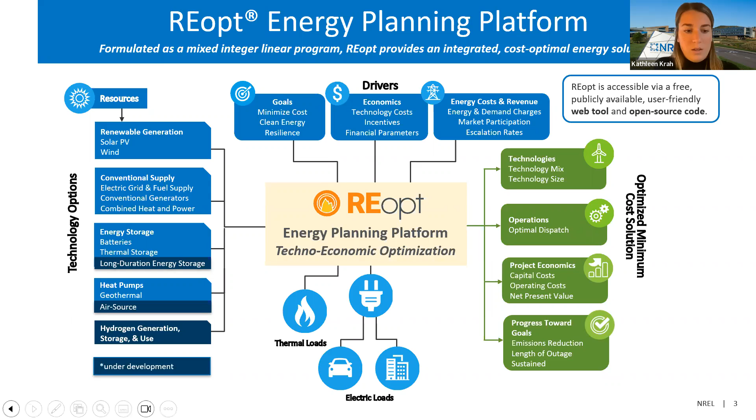I'll probably mention life cycle cost of energy throughout the presentation. So just wanted to share some definitions. So REopt is, as I mentioned, a life cycle cost optimization tool. So we're looking at the present value of all costs of energy at the site throughout an analysis period, typically 25 or so years, depending on what technologies you're focusing on.

So when I mention life cycle cost, I'm referring to capital costs of any technologies that the site has deployed on site, any incentives that might have been available to help mitigate those costs, O&M costs throughout the operating period. So that's typically applied annually, any electric grid purchases, and any fuel purchases.

And then the net present value of the DER system is the life cycle cost savings, or if it's a negative NPV, then the increase in life cycle energy costs with the DER system relative to the business as usual case. So if the DER system can provide cost savings, it will have a positive net present value. And that's the difference in life cycle costs between the business as usual and optimized scenario. So the higher the NPV, the more net value that the asset is providing.

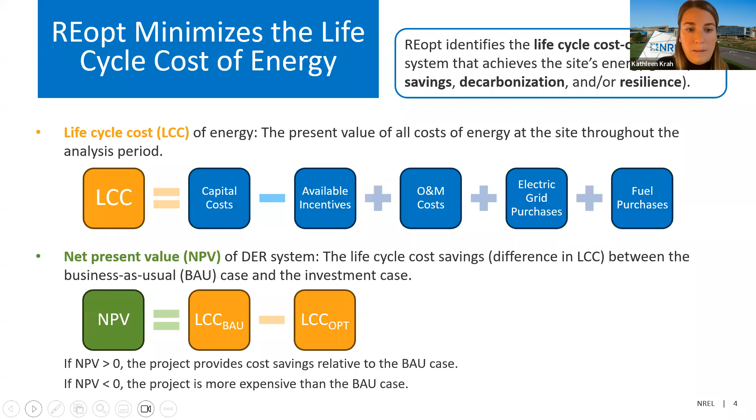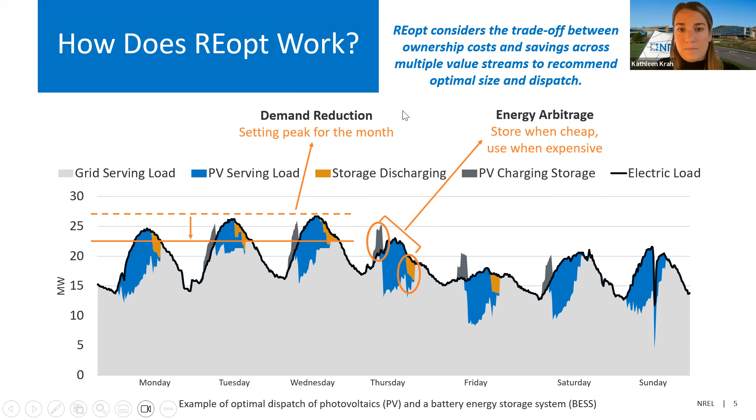Today we're going to focus on PV and battery as two of the more common DER technologies to be deployed commercially. But I did just want to highlight the thermal technology modeling that we also offer in REopt. I mentioned we model combined heat and power, geothermal heat pumps. There's also absorption chillers and hot water and chilled water thermal energy storage.

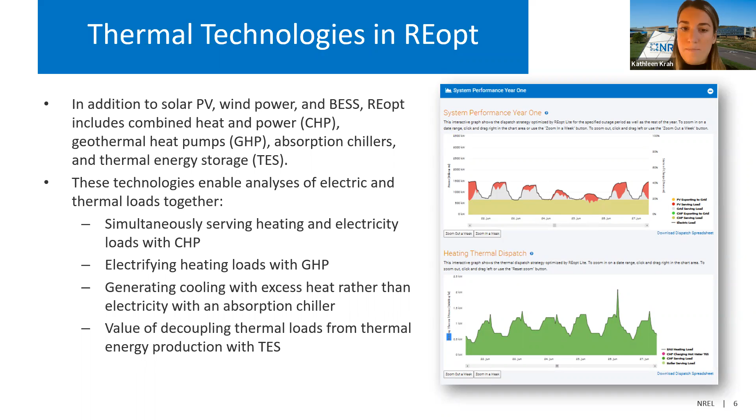And so REopt can help co-optimize between heating and cooling requirements with electricity demand and how these different technologies can help reduce overall costs and overall emissions and support resilience, both thermally and electrically.

I also mentioned the consideration of resilience in DER value. So we focus on resilience value of DERs in relation to how on-site technologies can help extend outage survivability of either critical loads or continuity of operations, or if there's a site that serves as a community resilience hub, there might even be an increase in load relative to baseline operations.

This site had a strong value of resilience. So you have to think about the costs of resilience versus the values of resilience. They wanted to increase the duration of survivability. They needed to keep the overall costs the same or lower. And so we used REopt and evaluated solar and storage to support cost savings and resilience.

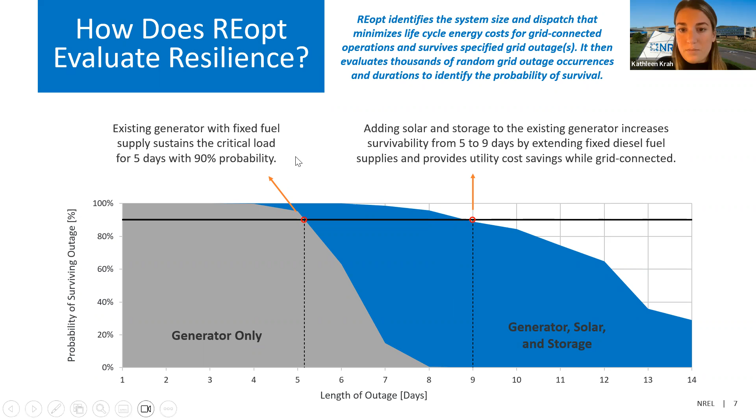REopt also does detailed renewable energy and emissions accounting. So we have hourly grid emission rate data modeled in REopt. We also use projections as assumptions about how grid emission rates may change in the future as the grid continues to become greener. And then also model fuel emissions for on-site fuel consumption, as well as renewable energy contributions. And so we're doing some renewable energy and emissions accounting in all of our REopt analyses.

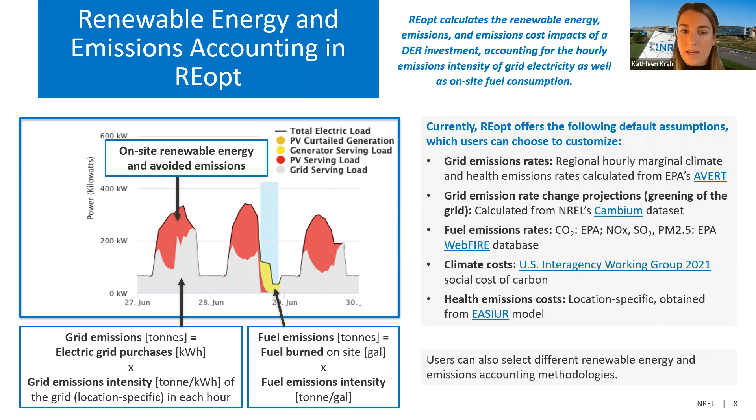So as I mentioned, renewable energy and emissions accounting is happening in every REopt analysis, but the user can use REopt to identify how to achieve, for example, 50% on-site renewable electricity annually at the site at least cost, or how to reduce the site CO2 emissions by some percentage relative to the business as usual scenario.

In that case, they can compare if there's an increase in life cycle cost of electricity in that reduced CO2 emissions scenario, and quantify the break-even dollar per ton CO2 cost of carbon dioxide emission reductions. And then we can also include climate and/or health emissions costs in the optimization, rather than just calculating the impacts after the optimization if desired.

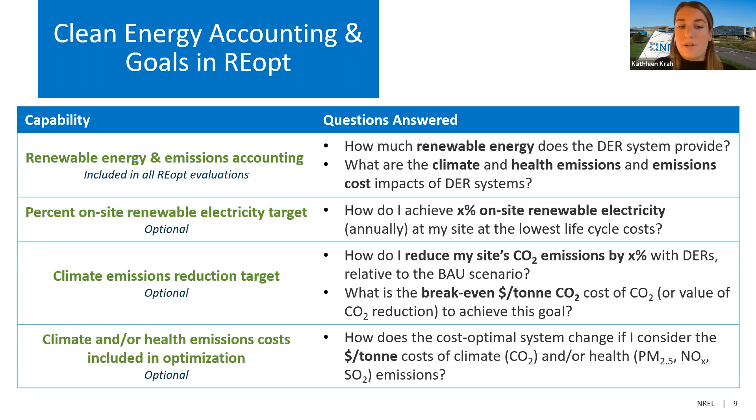I mentioned REopt is accessible as a publicly available free web tool, and then also the underlying open source code. I will be demoing the web tool and inviting participants to follow along on your own web browser to run a few REopt analyses today. But we try to make this user-friendly. The web tool offers a bunch of customizability.

I think there's over 100 different inputs that can be customized, but we only require 3 or 4 inputs. So it can be simple and easy and user-friendly, or more advanced depending on how much data you have, the user's level of expertise, and what phase of analysis, whether it's a high-level feasibility study or moving closer to the design phase.

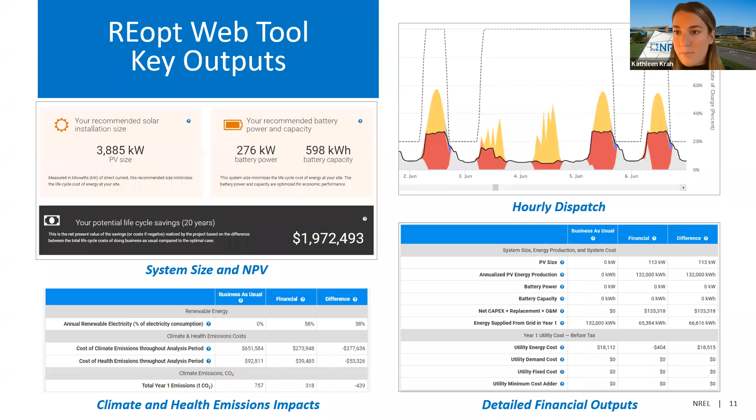And then we also show detailed financial outputs, comparing the business as usual case to the optimized scenario, showing the savings or increases in different aspects of energy costs and savings. And then there's also a pro forma that shows these economics year over year. That's actually currently being updated, so that's temporarily unavailable and not shown here, but I think is really useful for translating REopt outputs into RFPs and planning. And we hope to get that back up in the next few weeks or months.

So here are some links for accessing REopt. The REopt web tool, again, the focus of the training today, is available via web link. I also included the links for the various GitHub pages for the API, the Julia package, which is nested within the API, and then analysis scripts that allow users to use rather than just develop the API and Julia package. We also offer some web tool user guides on the REopt webpage where the tool is located. I'll point those out today during the demo.

And then we also have a user forum. I think most people who use this tend to be towards the development side, but we're hoping that more web tool users also use it. So we post any questions that we receive directly to make those answers more broadly available. And we're also trying to build some community around the user base. So definitely invite you to share any questions that you might have, and our team is pretty responsive in answering those.

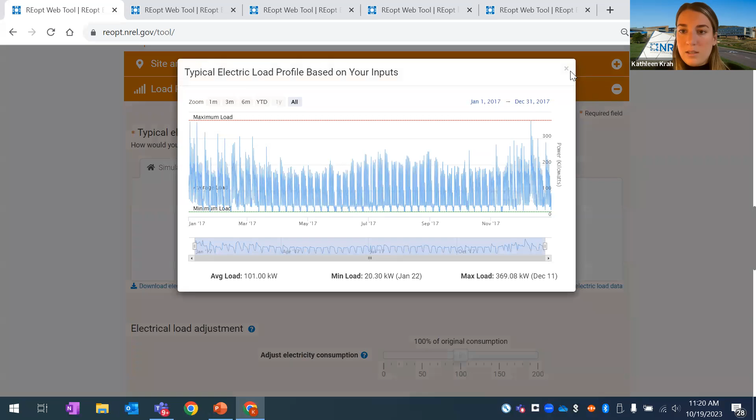I'll also mention if you want to chart your load profile, I should have mentioned this here, you can see what the simulated load profile looks like and see the patterns each week. You can see the days increasing and then also seasonal patterns. And you can also download this information if that's helpful for you.

And similarly, we can look at emissions factors. So by default, looking at the Rocky Mountain region, we can see how the simulated grid emissions vary throughout the year and throughout the day in this region.

I mentioned before, climate and health emissions costs could be included in the objective function or in the optimization if desired. We're not going to do that because those are less typically real costs actualized by the site. Those are more like societal costs. But you could consider those if desired.

And then there's some options to fine tune different accounting methodologies about how exported clean energy that's generated on site is treated. Are they allowed to count towards your renewable energy goals or carbon offsets? And then also we have the default climate emission and health emission cost rates down here. So this section, I typically leave all the defaults, but wanted to explain those different inputs.

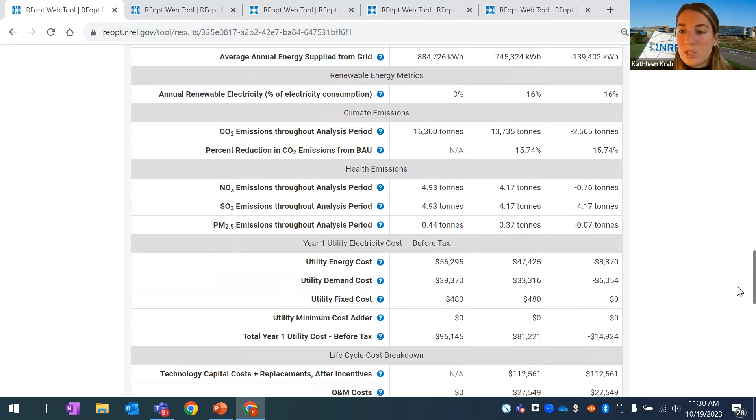emissions impacts, how much it's reducing emissions relative to the business as usual case, health emissions impacts, so NOx, SO2, and PM2.5 emissions impacts. Here we have a breakdown of energy and demand charge savings. So here we have the year 1 costs in the business as usual case, here the year 1 costs in the optimized scenario, and then here we show the savings, so negative value being savings.

And similarly, the life cycle cost breakdown, so capital costs after incentives, O&M costs, total utility costs, and some summary financial metrics, including capital costs before incentives, year 1 O&M costs, total life cycle costs, net present value, simple payback period, internal rate of return, and the LCOE of PV, levelized cost of energy.

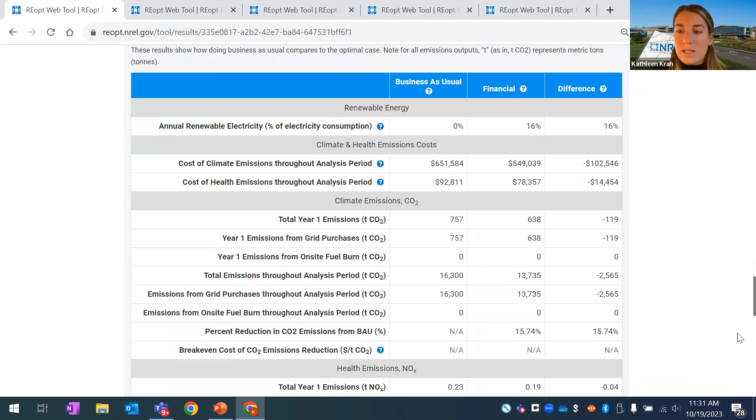You can also access your inputs here, renewable energy and emissions metrics in a little more detail than in the summary table. You can show the default values that were used, and some caveats and words of caution and next steps of how REopt results can be used to inform projects.

I think, let's see, I might pause here for questions, and then I can go back and show the resilience and clean energy and portfolio analysis capabilities if and as time allows. Yeah, so we've got a couple questions in the Q&A.

Awesome. First one is, when you input a site address, does the platform have the ability to account for the orientation when roof space is selected? Great question. We do not have geospatial data on roof angles, so that would be something that you would need to enter down below in the PV model.

So this array azimuth input, 180 means it's south facing, 0 would be north facing, so if you're in the southern hemisphere. But if it was offset from 180, either a little bit east or a little bit west, you could enter that information. I think Google Earth and Google Maps can be helpful for that estimation.

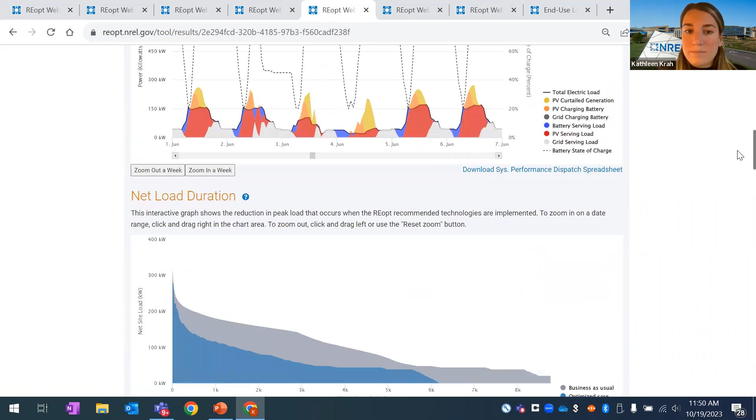A useful metric, I think, is to compare this net present value to the business as usual life cycle costs, because if your site has like $1 million of electricity costs, like some of the bigger campuses, throughout a 25-year period, an increase of $70,000 is not significant. If your site is only paying $10,000 a year in electricity costs, a $70,000 increase is very significant. So that's a helpful comparison point. But all the other outputs are the same types of outputs, just different numbers now with a larger system.

And then finally, I will demo the resilience capabilities. So I just copied that analysis. I'm actually going to deselect the clean energy goals and instead include resilience. And so that added this resilience accordion. So there are a few inputs now that get added for evaluating resilience.

So what REopt is doing for resilience is we simulate an outage or outages throughout the year. We simulate a critical load, so what portion of the typical load you want the on-site system to be able to support, and how long the outage would be. And REopt will identify a system that during normal grid connected operations is operating to maximize the value of bill savings and is able to sustain that specific outage.

Once that system size has been identified, REopt will also calculate the probability of surviving any range of outages, since these are specific simulated outages. So we'll just walk through an example of that. The critical load factor is the percentage of the typical load that would be desired to be served during the outage. By default, that's 50%.

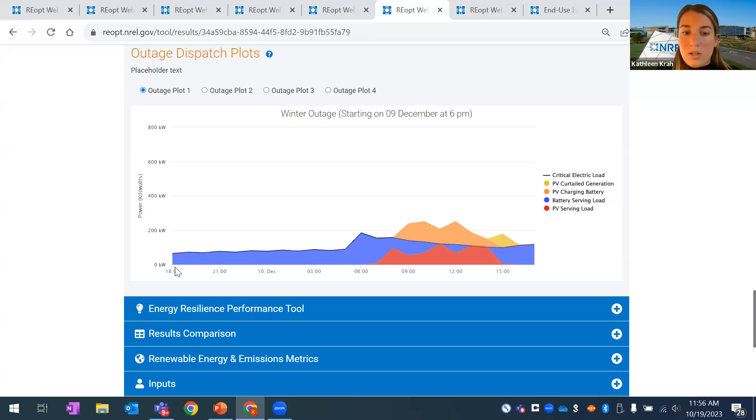Here we see the outage dispatch during the winter outage, spring outage, summer outage, and autumn outage. We also have an energy resilience performance tool, and this is also new and very exciting. So this is used to, I'm going to bump this up to 48. Here we consider the different system sizes that were optimized or identified by REopt, and then also consider technology reliability. So PV and battery, we're just looking at availability, but if we'd also included a backup generator, there are some other factors that are included in this.